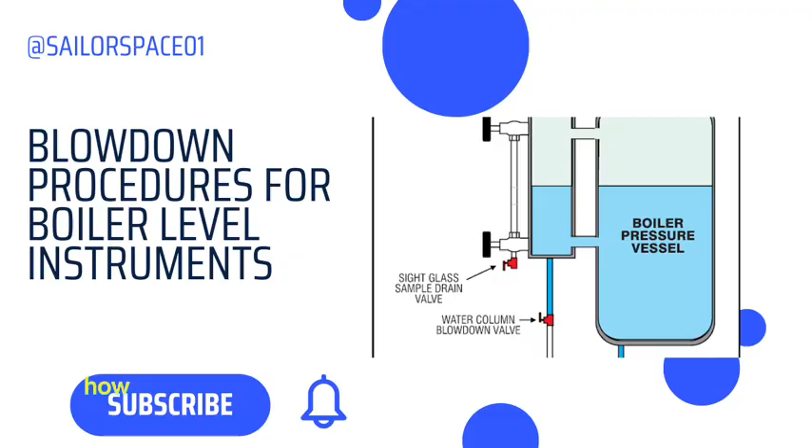Proper maintenance of the water level instrument on a boiler is crucial to keeping your plant running safely and efficiently at all times. We are going to demonstrate how to conduct a proper blowdown procedure on a boiler water gauge glass and a remote level indicator.

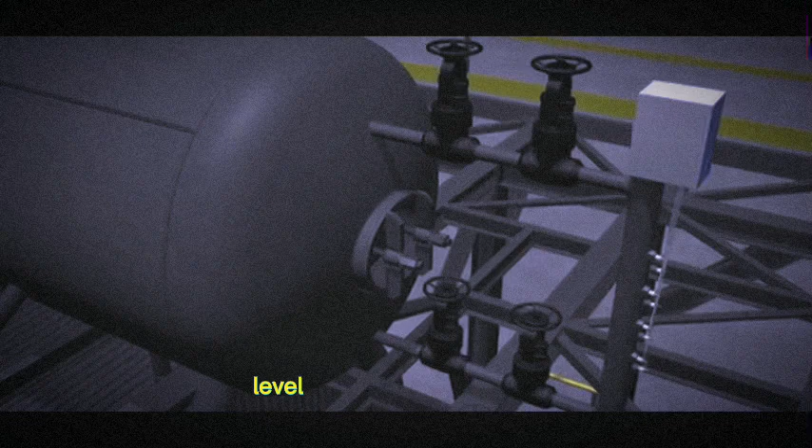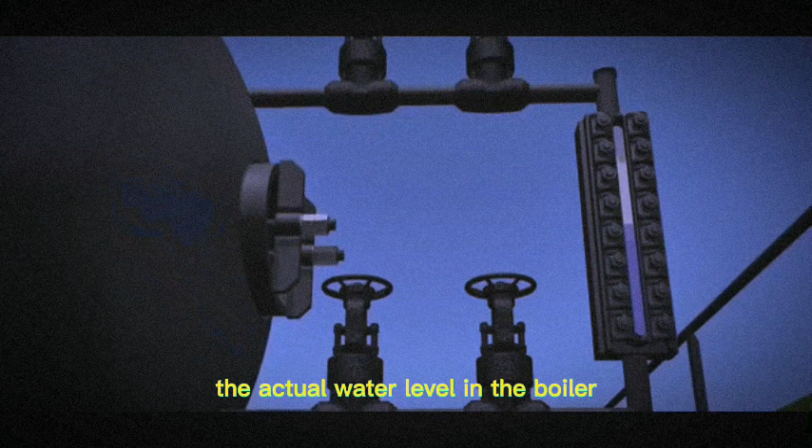But first, let's understand the purpose of this vital level indicating instrument. The water gauge glass on a boiler enables the operator to visually observe and verify the actual water level in the boiler. However, if not properly cleaned and maintained, a gauge glass can seem to show that there is sufficient water when the boiler is actually operating in a low water condition.

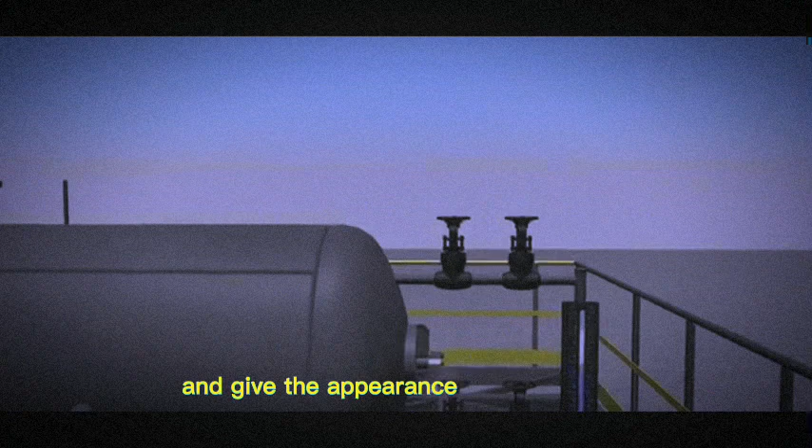Lack of maintenance may result in a stain or coating on the inside of the gauge glass where it contacts the boiler water, giving the appearance of a correct level indication, especially if the drum level happens to be outside the range of the level instrument.

Be sure that all planned procedures have been followed and the control room operator is aware that a blowdown of the level instrument is about to take place. This will prevent any false trip of the boiler or unexpected drop in level indication for the primary control operator.

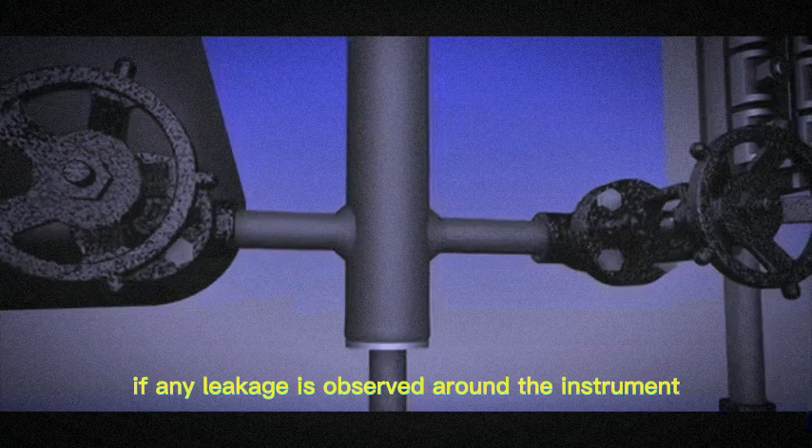Before conducting this procedure, inspect the installation. If any leakage is observed around the instrument or in isolation valves, determine the source of the leak and make the repair. Then proceed with this blowdown procedure.

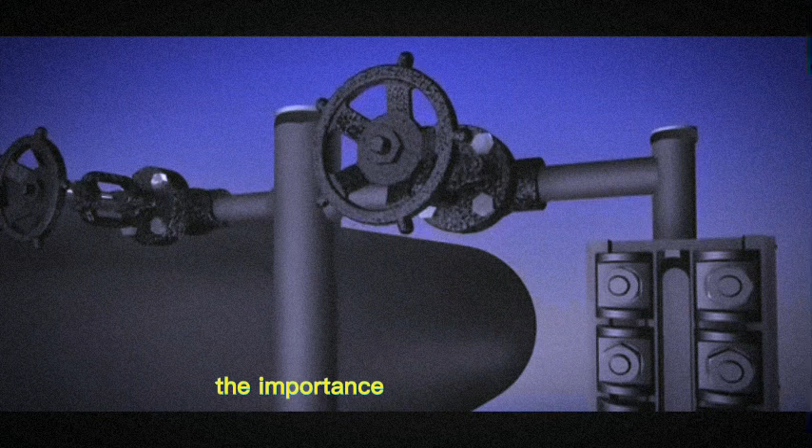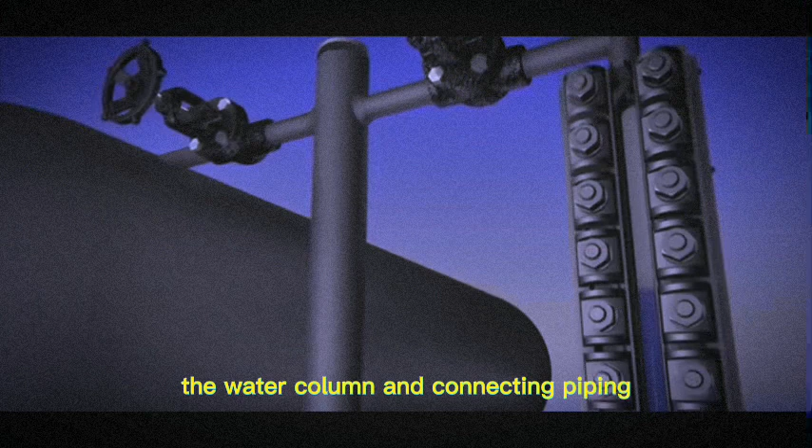The importance of proper cleaning and maintenance of the water column and water gauge glass or level indicator cannot be stressed enough. The water column and connecting piping must be kept clean to ensure the water level in the gauge glass accurately represents the water level in the boiler.

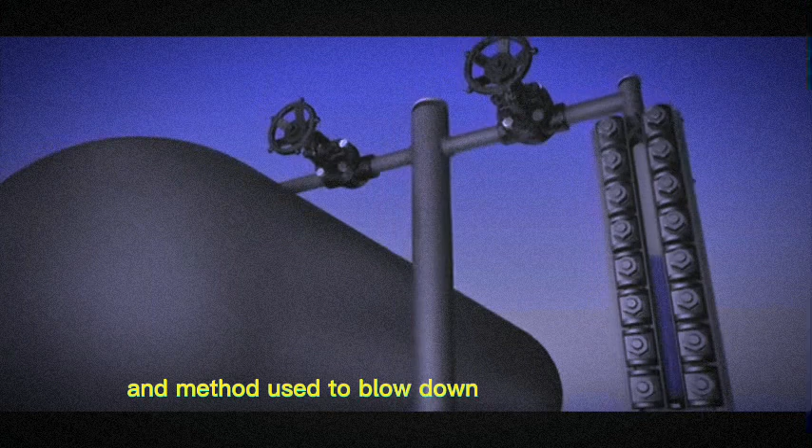The frequency and method used to blow down a level instrument may affect service life and performance of the water column, gauge glass, or level indicator. At a minimum, we suggest weekly blowdowns on gauge glasses and monthly blowdowns for level indicators, with a maximum duration of 20 seconds. Excessive duration of blowdown time will shorten the life of the gauge glass or level indicator.

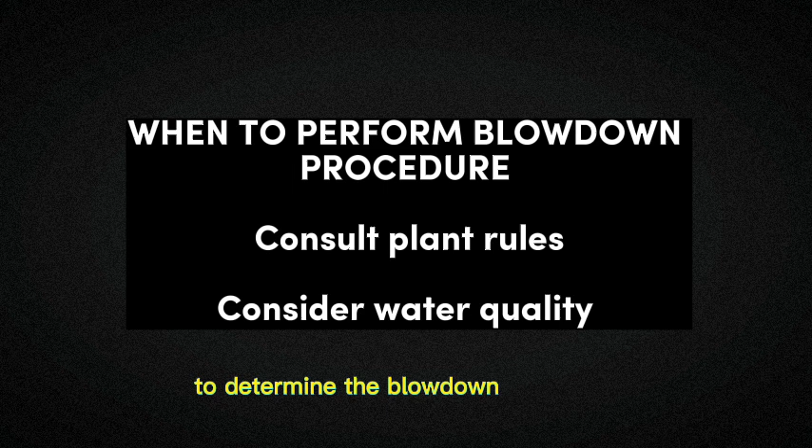However, plant rules will determine the actual frequency required. The user may also consider the quality of their boiler water as an influencing factor to determine the blowdown frequency. Furthermore, operators must consider proper blowdown procedures in order to keep the connecting water piping clean.

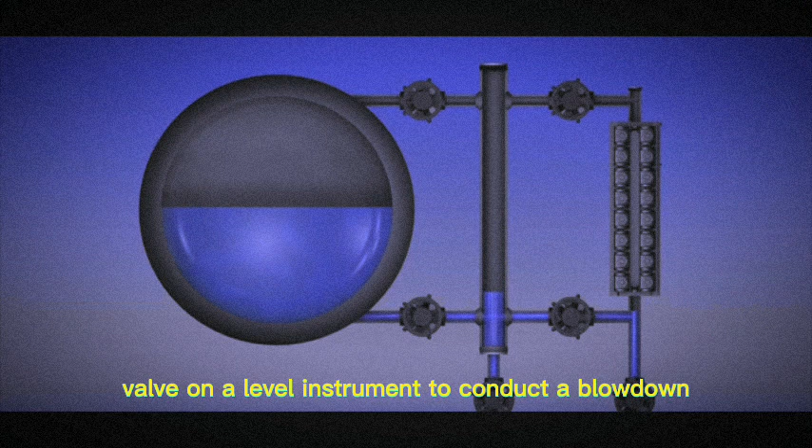Even if the glass or level sensors remain clean for extended operational periods, simply opening and closing the drain valve on a level instrument to conduct a blowdown will not ensure that water is flowing freely from the boiler drum through the water piping to the level instrument.

However, by conducting the blowdown in this manner, the water that is in the instrument will drop and go out the drain, but there is no assurance the water leg piping between the boiler drum and the level instrument has been flushed. This is because the steam and water are both flowing from the outlet of the open drain.

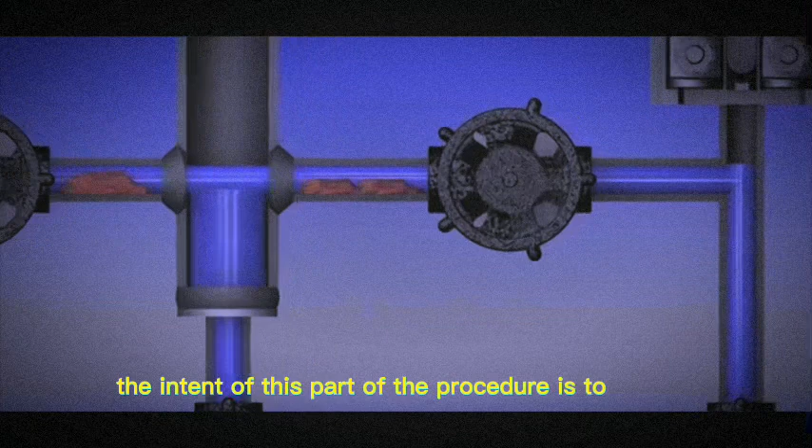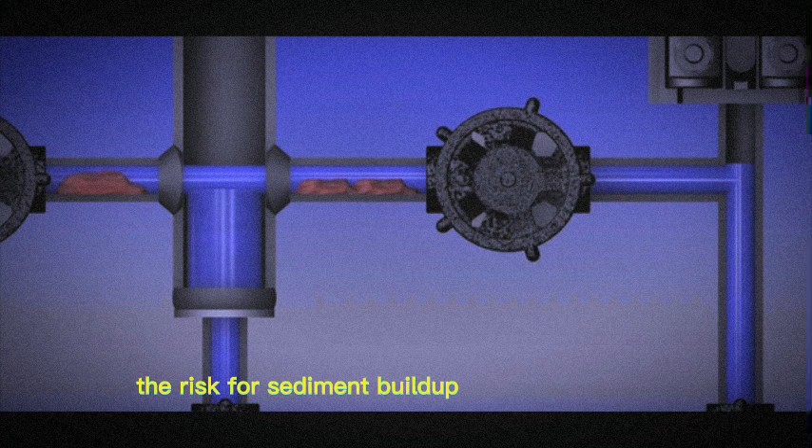By following this procedure, the operator will ensure that the steam and water both flow freely in this piping by testing them independently. The intent of this part of the procedure is to remove any debris or sediment from the water leg piping, while the risk of developing a blockage in the steam piping is very low. The risk for sediment buildup in the water piping is much greater over time.

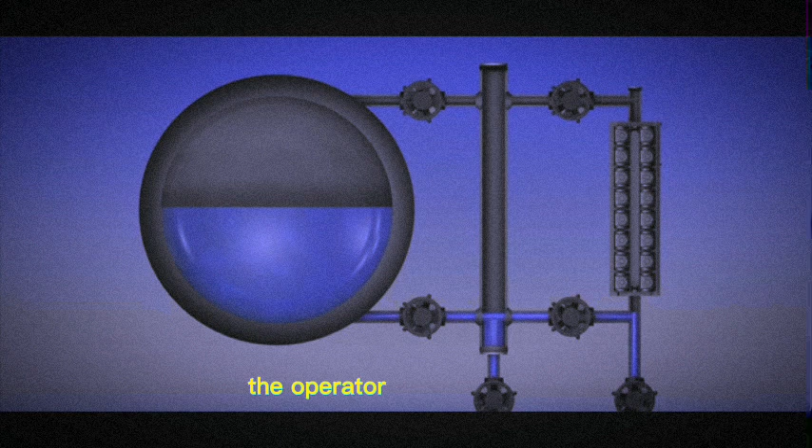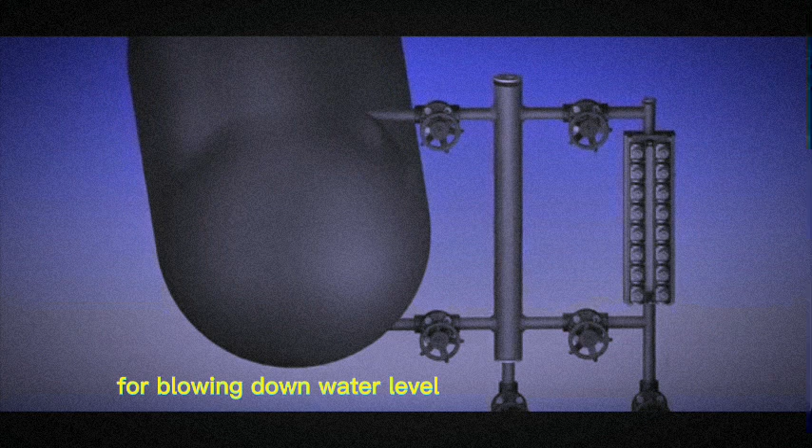After following the blowdown procedure for a gauge glass or remote level indicator, the operator can be assured the steam and water connecting pipings will be thoroughly flushed. We will now describe the recommended procedure for blowing down a water level indicating instrument on a power boiler that's been constructed to meet the requirements of the ASME boiler and pressure vessel code.

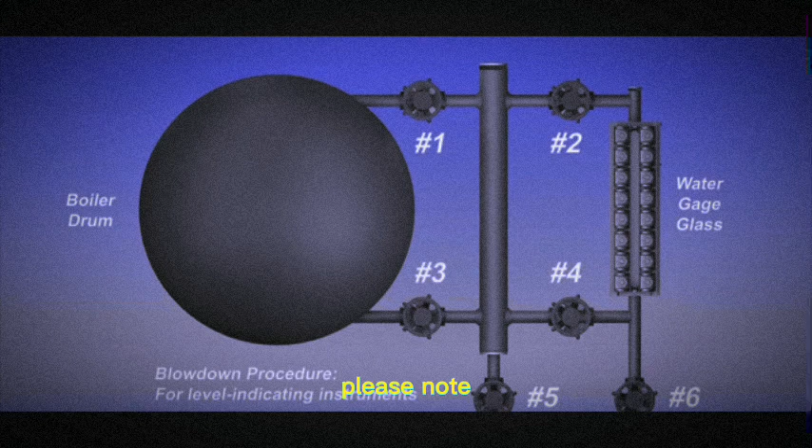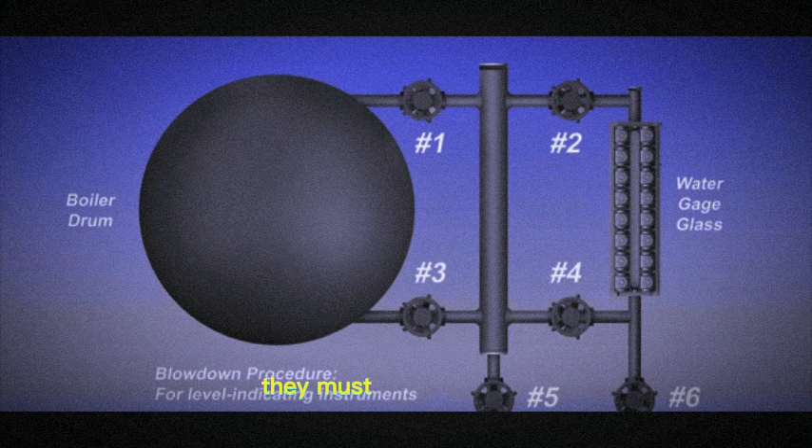Please note, isolation valves between the drum and the water column, number 1 and number 3, are optional by code. However, if they are installed, they must be locked open under normal operating conditions. The drain valve number 5 on the water column is required by code.

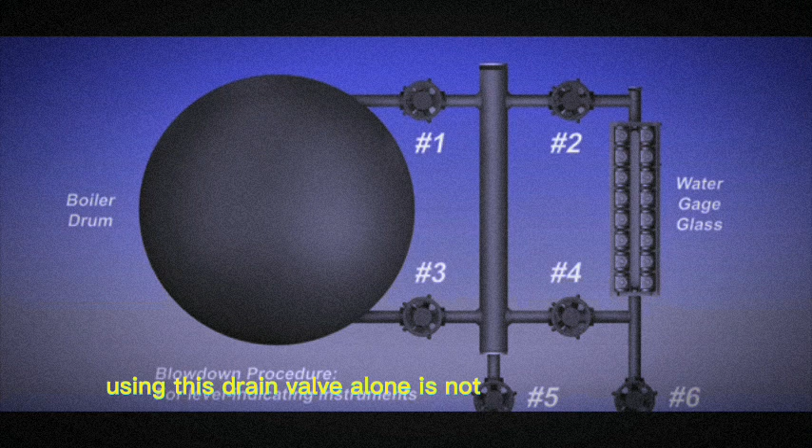Using this drain valve alone is not a sufficient method to flush all the steam and water piping. This valve will remain closed during the following procedure.

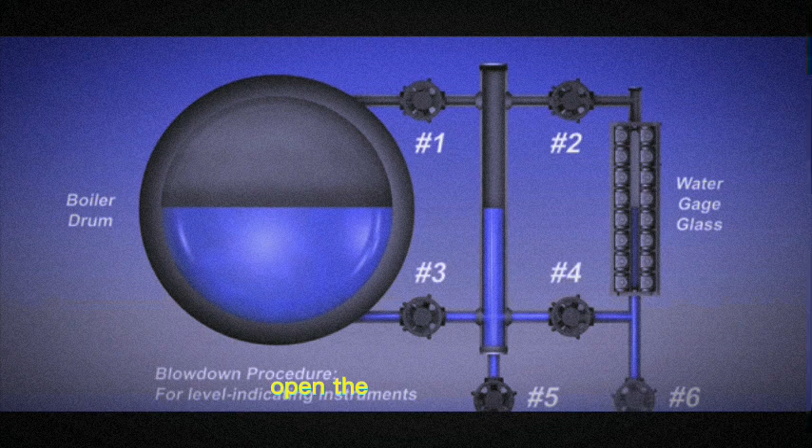To begin the blowdown procedure, close the steam valves number 1 and number 2. Next, with water valves number 3 and number 4 in the open position, open the drain valve number 6 and the water will discharge. Water will be flashing due to the elevated temperature.

This discharge from the water leg piping should be observed flowing out of the drain. The drain must be routed to a safe location away from the operator. The drain piping may be routed to a condenser tank or location away from the instrument, which may require a second individual in order to validate the flow.

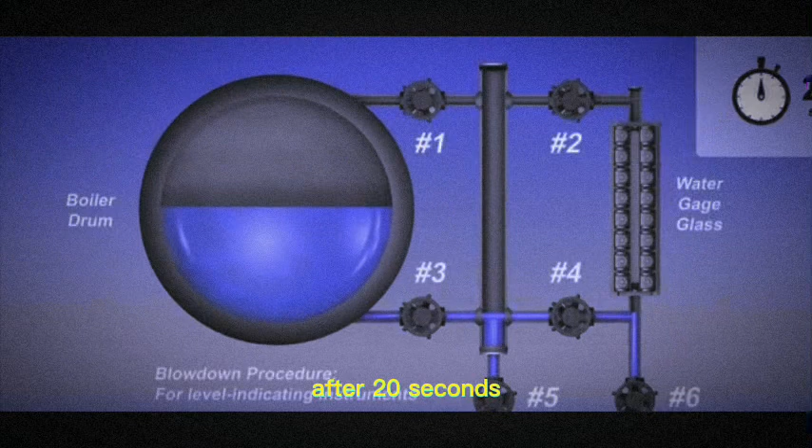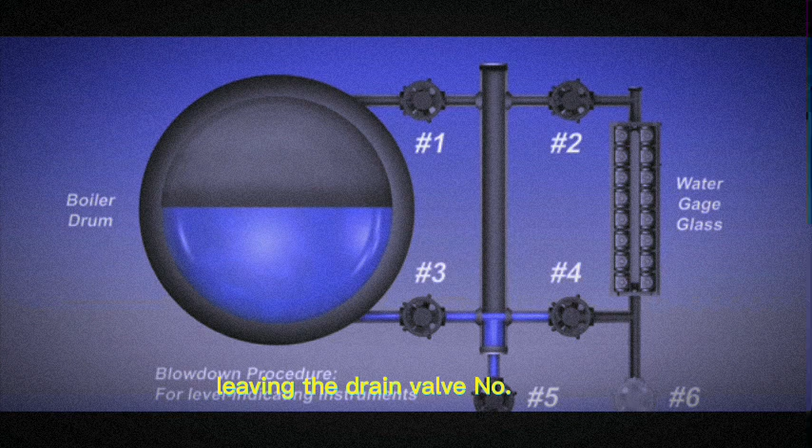After 20 seconds, close the water valves number 3 and number 4. Then open the steam valves number 1 and number 2, leaving the drain valve number 6 open. Steam will flow through the gauge glass and the drain valve outlet.

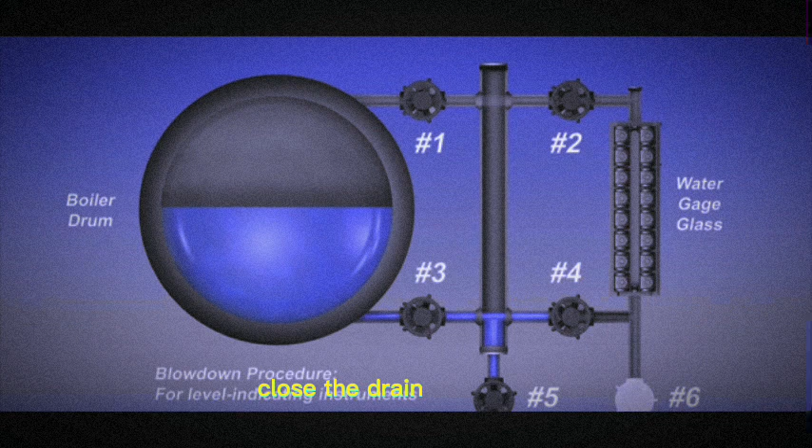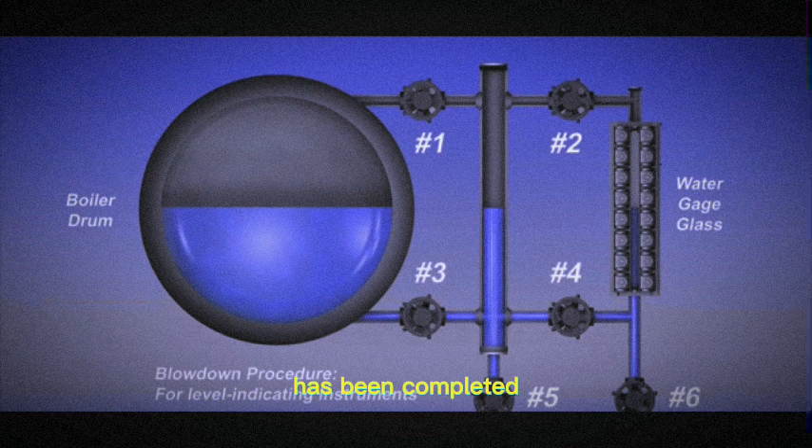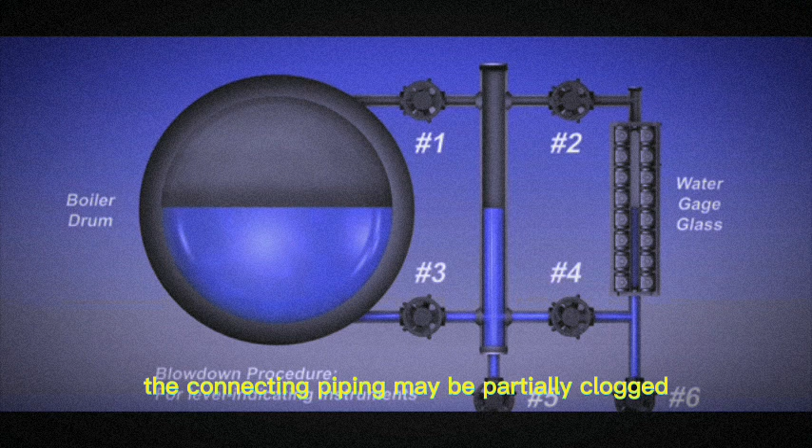After an additional 20 seconds, close the drain valve number 6 and open the water valves number 3 and number 4. The blowdown procedure for a gauge glass configuration has been completed, and the indicated water level should promptly return. If the water level does not promptly return to normal, the connecting piping may be partially clogged and need to be physically cleaned.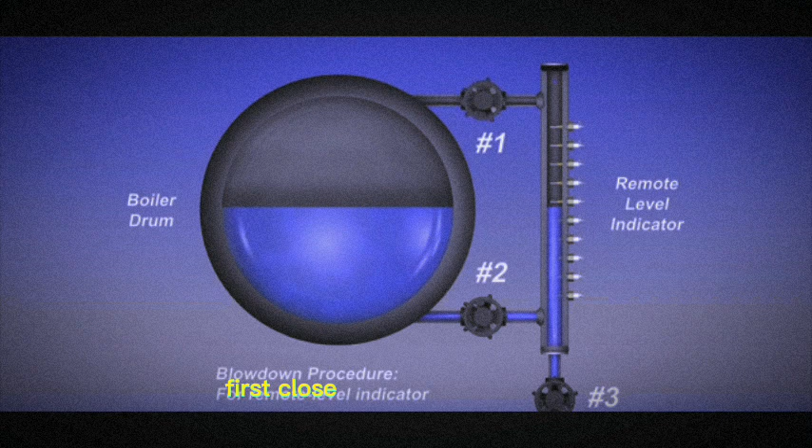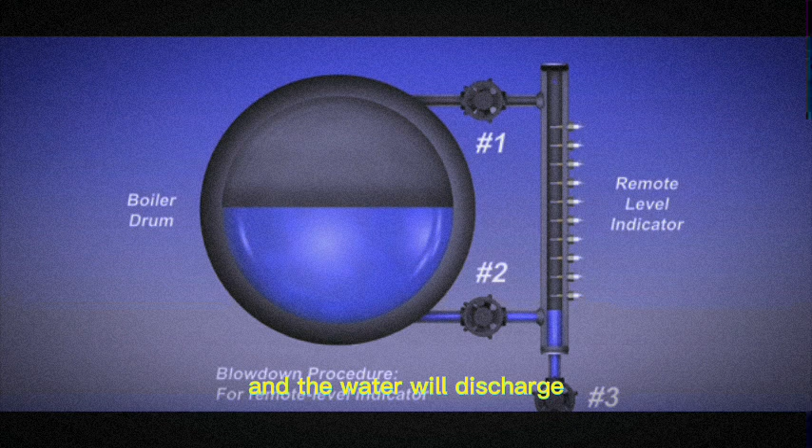To begin the blowdown procedure for a power boiler configured with a remote level indicator, first close the steam valve number 1. Next, with water valve number 2 in the open position, open drain valve number 3 and the water will discharge.

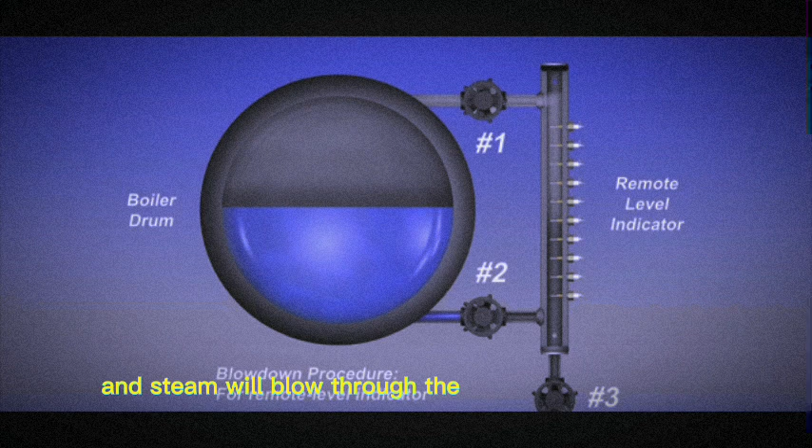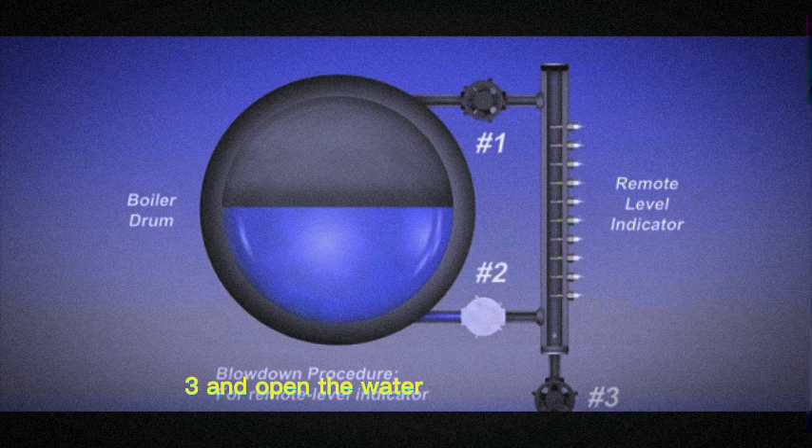After 20 seconds, close the water valve number 2, then open steam valve number 1 and steam will blow through the remote level indicator and the drain valve outlet. After an additional 20 seconds, close the drain valve number 3 and open the water valve number 2.

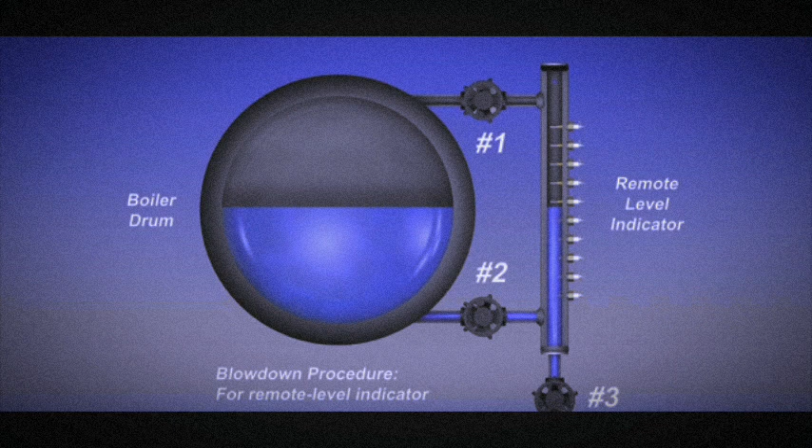The blowdown procedure for a remote level indicator has been completed, and the indicated water level should promptly return. If the water level does not promptly return to normal, the connecting piping may be partially clogged and need to be physically cleaned. Finally, as an important safety tip, operate all of these valves slowly. This enables the operator to carefully observe the valves and instrument while conducting this procedure.